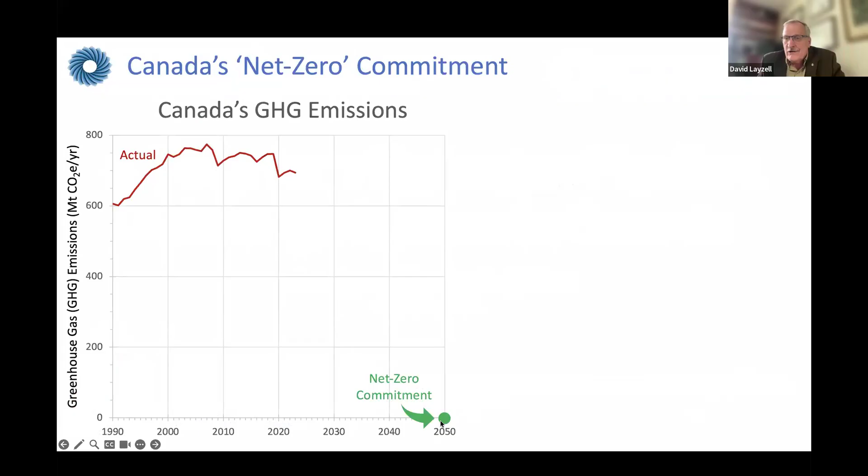The reason we're talking about hydrogen, of course, is because of this climate change problem we have and this greenhouse gas problem. Canada's been successful in the last 25 years in trying to taper off its continuously rising greenhouse gas emissions. So we're stabilized now and slowly coming down at around 700 million tons of CO2 per year. But that's still a long way away from our net zero commitment by mid-century, which is way down here. So obviously we've got a long way to go to reduce our greenhouse gas emissions.

Let's look at what comprises those greenhouse gas emissions in Canada. And about 80% of it is the red colored zones here, which is all associated with, of course, our energy use.

The part I'd like to focus on is that 46% of our emissions in Canada are associated with the combustion of energy carriers that serve end-use demand in sectors like transportation, buildings, and non-energy industry. Specifically, we're talking about gasoline, diesel, jet fuel, and natural gas. There are a few others, but they're small percentages—most of it is these four energy carriers.

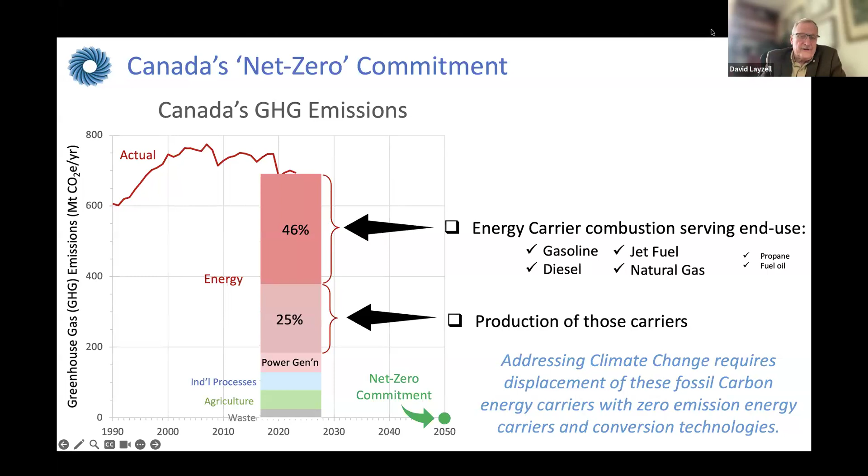Another 25% of our emissions are associated with the production of those energy carriers. So it's very clear that if we're going to address climate change, we're going to have to displace these fossil carbon-based energy carriers—gasoline, diesel, jet fuel, natural gas—with zero emission energy carriers. Often that requires a change in conversion technologies as well to deliver the energy service that society wants and needs.

So one of the questions is, what are the zero emission energy carriers we can use? This is not a very long list, I'm afraid—there's not a lot we have to choose from. Electricity is clearly the energy carrier of choice for decarbonizing many sectors.

Today, electricity provides about 22% of the end-use energy demand by the end-use sectors. Our analysis and analysis of many other groups suggests we can get up to 50 or 55, maybe even a little bit more than that, before we find that electricity as an end-use carrier just doesn't work, for reasons of storage challenges or mobility issues, etc.

Biofuels are another possibility, and they now cover about 6% of Canada's energy needs. It could probably go up to 10 to 15%, especially if we moved and converted biofuels into liquid fuels to help in transportation—for example, sustainable aviation fuels.

We could continue using fossil fuels, but actually add carbon capture and storage to them. Our fossil fuels now are over 70% of our end-use energy demand, and it probably has to drop dramatically, because in the future we're going to need CCS tied to those fossil fuels, and that really limits the applicability of fossil fuels on end-use energy demands because of the CCS challenge.

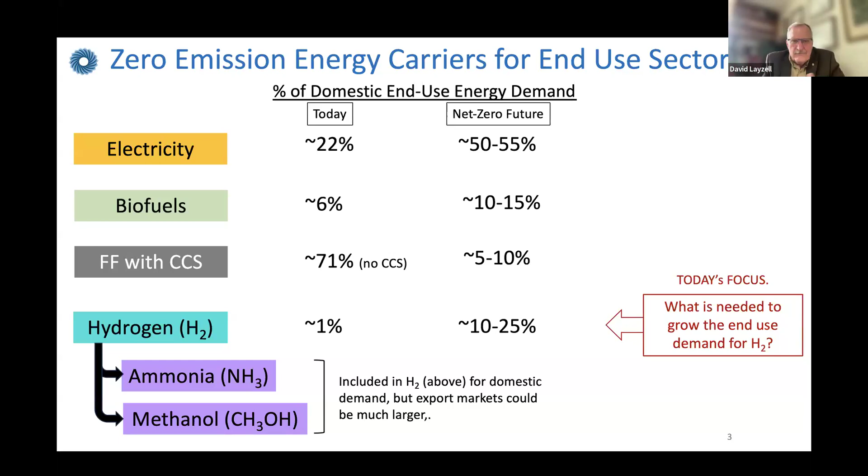So one of the questions, really the focus of the discussion today, is what is needed to grow the end-use demand for hydrogen. In the short term we have different strategies than in the longer term. Briefly, in the short term, the early stage strategies for low carbon, low GHG hydrogen deployment are really focused in two areas. One is to decarbonize our existing large scale production.

We produce about 8,000 tons of hydrogen a day across Canada, and virtually all of it is used as an industrial feedstock—making fertilizer, perhaps making methanol, also cracking bitumen into synthetic crude oil, and upgrading oil into transportation fuels, etc. So there's a focus certainly on decarbonizing that hydrogen production and sequestering the CO2 from it. That certainly is something that needs to be done.

The other area of focus is hydrogen as a transportation fuel, and the reason this has been selected is because transportation fuels actually sell for about 10 times or more the price of heating fuels. And so with a fuel cell, one can extract and convert hydrogen efficiently into electricity and extract the efficiency benefits of electric drivetrain vehicles, but in larger vehicles like big trucks and trains, etc.

The problem with this sector, and the big challenge anybody who's been working in this for the last number of years trying to move towards hydrogen as a transportation fuel is having, is really the high cost to purify, liquefy, transport, and deliver that hydrogen to the fueling station. But that's a challenge we have at the stage we are today, and there is certainly progress year by year as we try to move towards deployment of hydrogen.

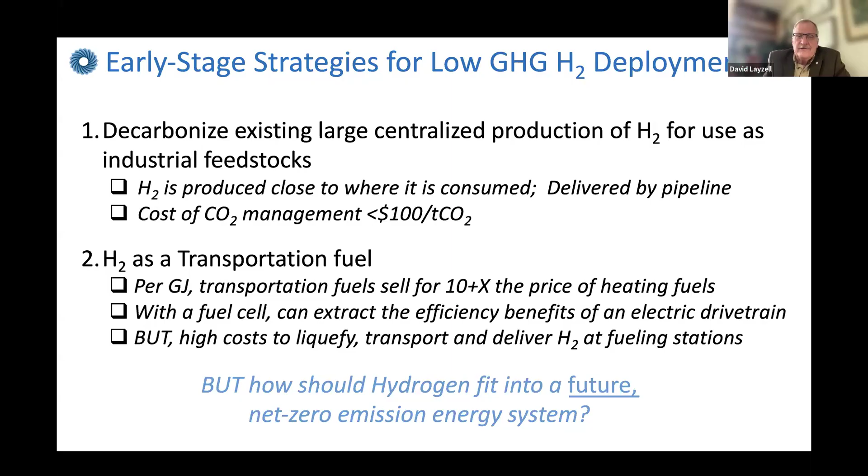What I'd like to do is jump forward and look at the role that energy systems analysts are looking at for hydrogen to fit into the future in some future net zero energy system. There's a growing consensus that what we really need in a future net zero emission energy system is essentially four complementary grids, if you like, none of which produce or put much carbon dioxide—or any—into the atmosphere, and some are actually removing carbon from the atmosphere. The one, of course, is electricity.

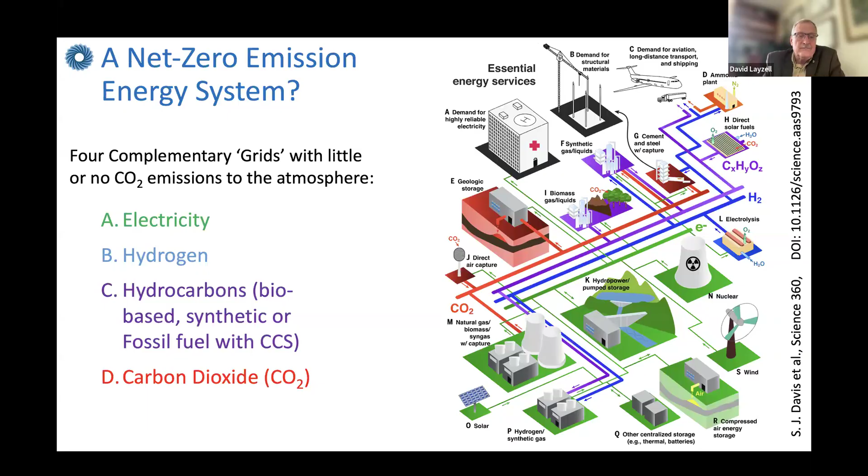An electrical grid is expansion and improvements of the grid we have today. Another is a hydrogen pipeline system with storage and moving hydrogen around. And a third one is a hydrocarbon grid, but where the hydrocarbons are based more on bio-based or synthetic hydrocarbons. And if fossil fuels are involved, it's combined with carbon capture and geological storage. And then a CO2 grid that basically picks up the carbon and either takes it to storage sites or uses it as a feedstock for hydrocarbon production with hydrogen along with it.

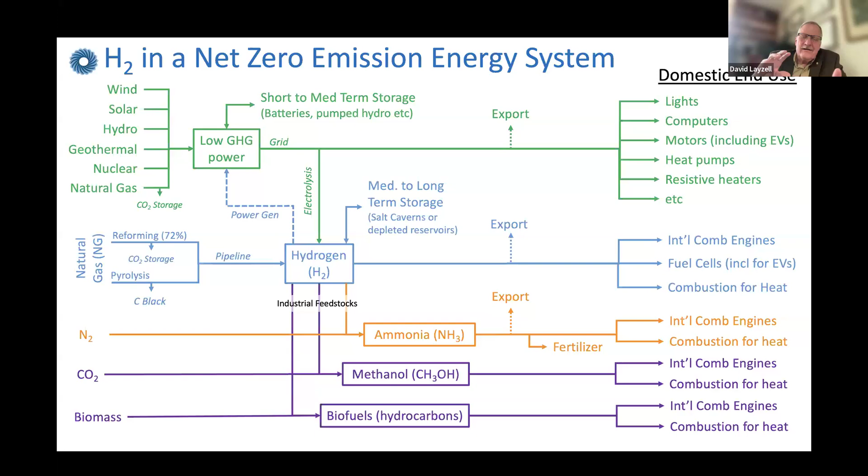So in some ways, this kind of a diagram, with a lot of information on this slide, summarizes some of the key components of how hydrogen could fit into a net zero energy system. What I'd like to do is highlight a few key features as we go through, so you're going to see this background chart with different parts highlighted.

Important to start with is that the low GHG electrical grid is really the backbone of the energy system, but it has some significant challenges as deployment increases from the 22% of our end use demand today as we get to 30 to 40%. These challenges often become more and more severe.

One is the problem of intermittency of supply. For example, wind and solar are intermittent supply, fantastic energy sources, low cost. But what you need is electricity storage and peakers to make up for them and to get them working best in an energy system. We also have conditions as we get more wind and solar, and even nuclear and others where supply, because nuclear can't be turned down very easily, can exceed demand. And what gets wasted is energy and poor economics from the cost of producing electricity that's not being used.

And it's particularly challenging for electrical systems to deal with large swings in demand, for example that can happen seasonally. This is certainly when you talk to grid operators, the idea of moving space heating to electricity, it's great in small amounts with moving to heat pumps, etc. But as you start looking at entire heating loads for space heating, from large buildings and small, moving to electricity becomes difficult for grids to handle.

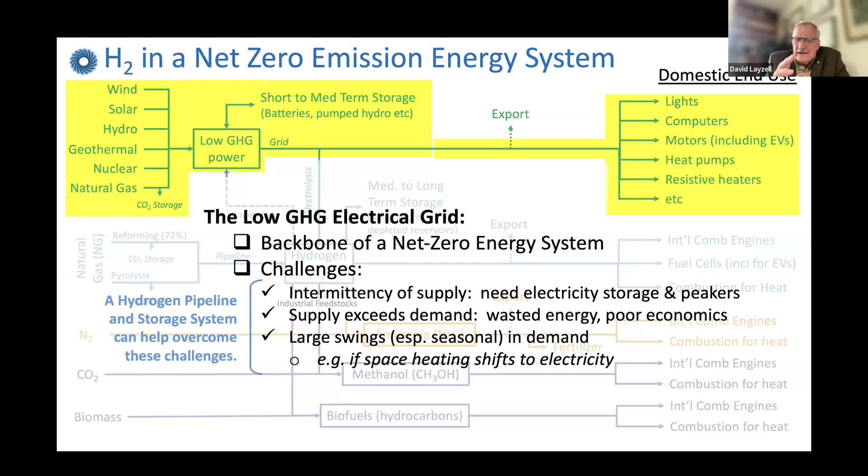And a hydrogen pipeline and storage system, I think, is key to help overcome some of these challenges. For example, hydrogen could be an on-demand sink for excess power. But in order to do this, you really need pipelines and storage that are linked to locations where the grid can put electrons and use some of the excess electricity to make hydrogen through electrolysis and put it into medium and long-term storage, if it's not being used directly.

And storage in hydrogen, we've got a lot to learn, and we can gain a lot of insight from the way our natural gas energy system works with pipelines and salt caverns and depleted reservoirs for storage. And certainly countries around the world are starting to look at hydrogen using similar resources and similar infrastructure in the future.

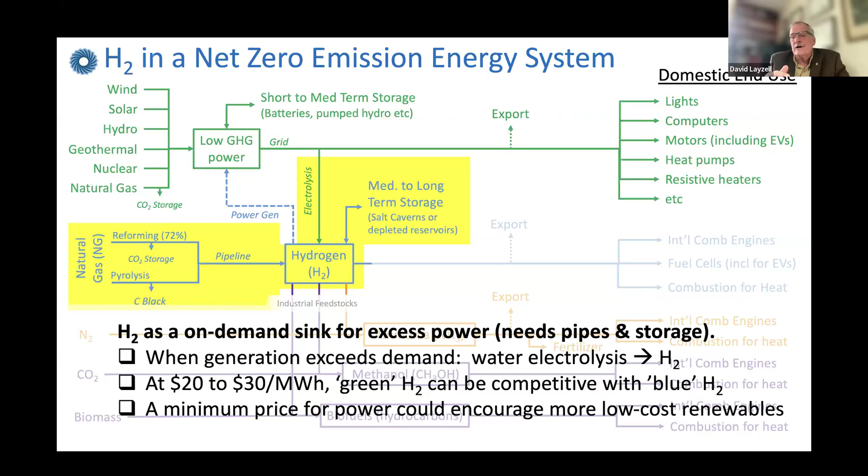And if you get a price of say $20 to $30 a megawatt hour for this excess electricity, green hydrogen can be made competitive with blue hydrogen today in Western Canada. So that demonstrates it's difficult to make green hydrogen competitive with blue if you're paying a lot more than $20 or $30 a megawatt hour. But you can do it with a low price, and certainly $20 to $30 a megawatt hour is better than just throwing the electrons away. And a minimum price for power could actually encourage more low-cost renewables coming onto the grid.

One of the issues is, once you've had more hydrogen being brought in through such a process, what are the optimal uses? Certainly heavy duty transportation, trucks, rail, etc., is again important, and it can be made even more cost effective with pipes and storage than with trucking it around as liquid hydrogen. Medium and high temperature heat is another possibility where hydrogen could actually start to provide a source of heat for larger industrial buildings.

I would say a relatively low priority is taking that hydrogen back to electricity again, because the efficiency losses there are only about 55% at best to take the hydrogen back to electricity.

And one's better to basically look at seasonal storage where you're using it for heat or other parts of the energy system.

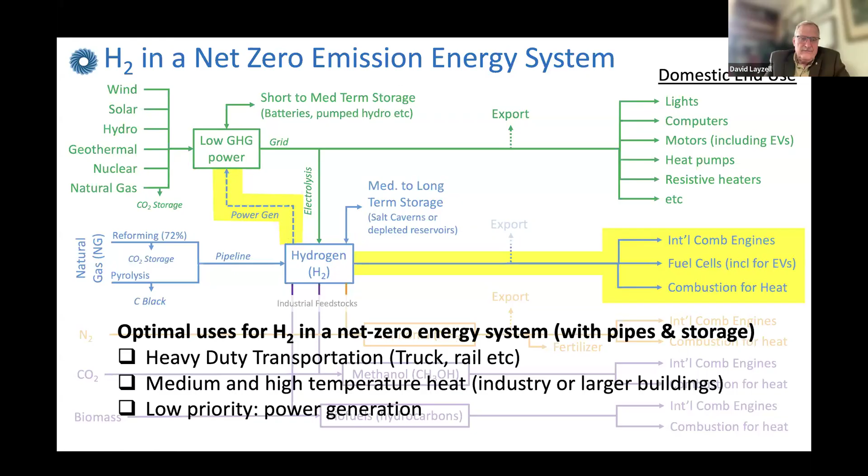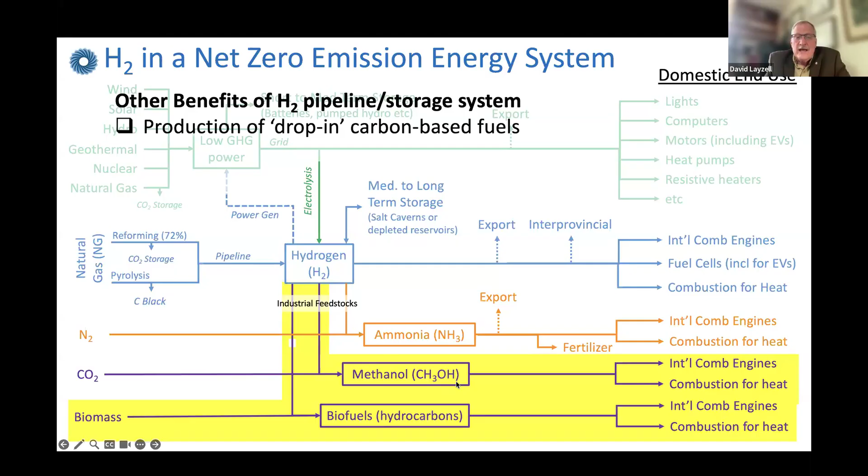The last thing to point out here is that if you have a hydrogen pipeline storage system, one can start to use this hydrogen to enable, in areas that have a lot of biomass production, the production of biofuels or hydrocarbons from lignocellulosic biomass or from CO2 into energy carriers. Or there's even the possibility of ammonia production, which would be used not only as a fertilizer, but actually as an energy export product.

Indeed, Canada today exports about two-thirds of the energy it pulls out from Mother Nature. In a net zero energy future, I think the world's going to be looking to Canada to provide zero emission energy carriers for the future. And certainly there's evidence of that even today, with countries looking to Canada to potentially provide zero emission energy carriers.

One thing that's important to note is if you want to move large amounts of low carbon energy long distances, hydrogen is about 20%, or one-fifth the cost, of moving a similar amount of electricity for a similar distance.

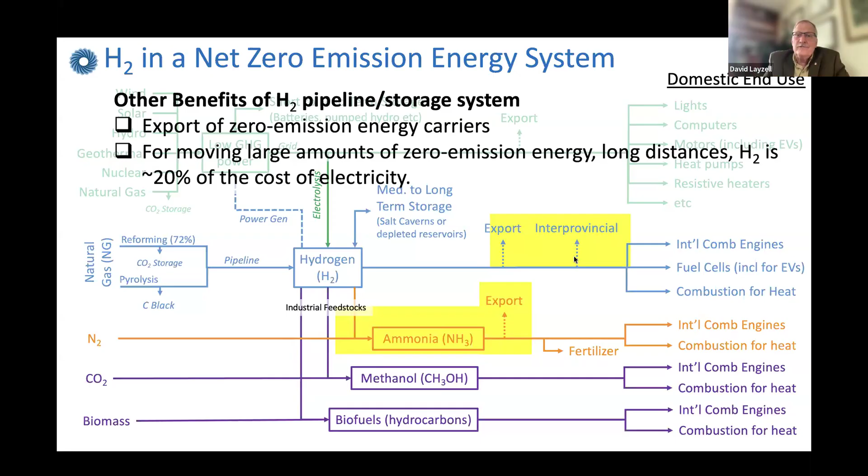So I hope to communicate the real importance of having research groups like Ron Hugo's, which we're going to be hearing about, looking at the role of, and the challenges and opportunities for, hydrogen pipelines and hydrogen storage systems as we move to a net zero future. Thank you.

Great. Thank you, Dave. Really appreciate that. I think you certainly made a strong case for the why and the need for large scale hydrogen infrastructure.

Now, I'm hoping we can switch gears a little bit here and get a sense of where we are today, what research is ongoing into pipeline storage systems. We all know the University of Calgary is an excellent university doing some really impactful research. So Ron, are you able to tell us a little bit more about the Pipeline Engineering Center and the research you're working on? I'd invite you to feel free to share your slides as well.

Okay, thank you, Zach. Can you see that? Yes. Okay, all right. Well, thank you for the introduction earlier.

I'm a professor in mechanical engineering at the University of Calgary, and I've been the director of our Pipeline Engineering Center for probably about 15, maybe a little bit more, years now.

The Pipeline Engineering Center at the University of Calgary was initiated at the request of industry. Those who are in Calgary will know that every two years we have the International Pipeline Conference. It was a group of people who put that together, and had been teaching at the University of Calgary through ContEd, and they wanted to see a more formalized training program. So they approached engineering, specifically mechanical engineering, and that was when we put together the Pipeline Engineering Center.

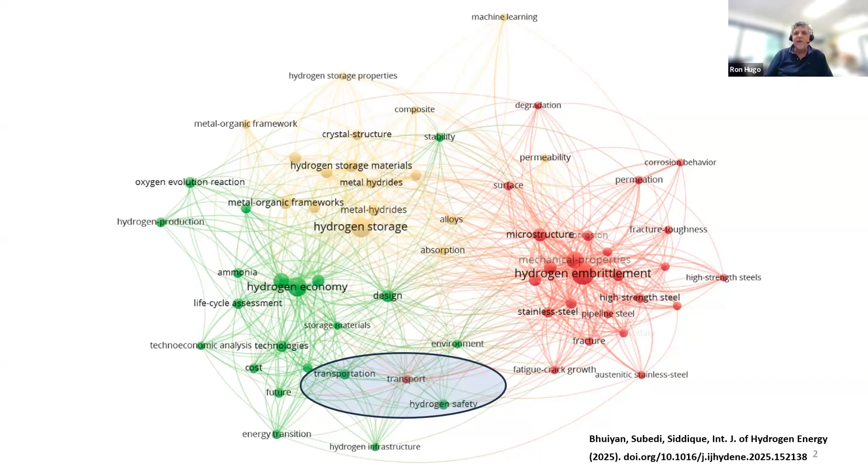We look at transportation, we look at safety. Other researchers within the university look at the material science aspects. I know a little bit about that, probably enough to be dangerous, but I can answer some questions on that. The majority of our work is looking at hydrogen safety, which is what I'll be talking about in the next few slides.

So an overview: I'm going to talk about a number of our current research projects. One involves a digital twin of transmission pipelines. Another one, Dave mentioned other vectors for hydrogen, so we have one project looking at leak detection from an ammonia pipeline.

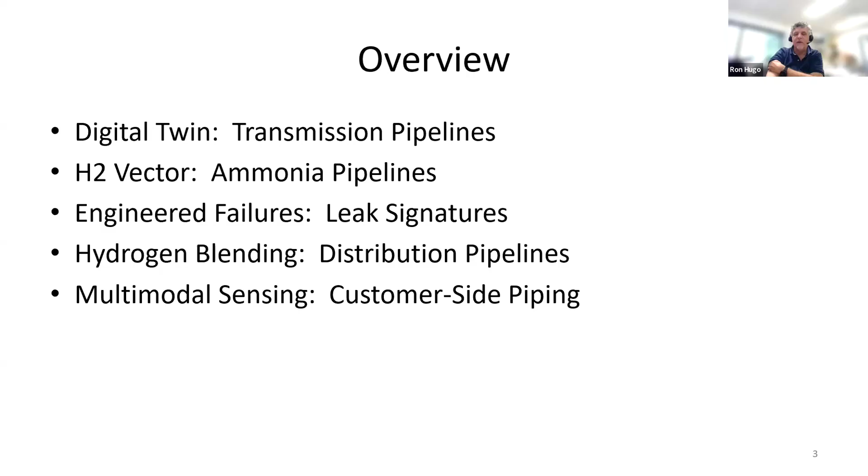I'll discuss a little bit about engineered failures. What we try to do is recreate real world failures from pipelines, and the purpose is to record the mechanical signatures associated with the leak, which then gets integrated into leak detection algorithms. I'll also talk about hydrogen blending from the distribution pipeline, specifically customer side piping, and then multimodal sensing is where I'll close it up.

All of our research is underway through the Advanced Pipeline Research and Innovation Laboratory, made possible through a donation from Plains Midstream Canada, as well as the former CEPA, now Energy Connections Canada. They enabled us to put together this lab that gives us the ability to do a wide range of research projects, some of which are the hydrogen ones I'll be talking about today.

The first project is about hydrogen transmission, sponsored by Alberta Innovates. What we're doing is developing a digital twin of a hydrogen transmission pipeline system, through a number of different steps, which I'll go through in the next set of slides.

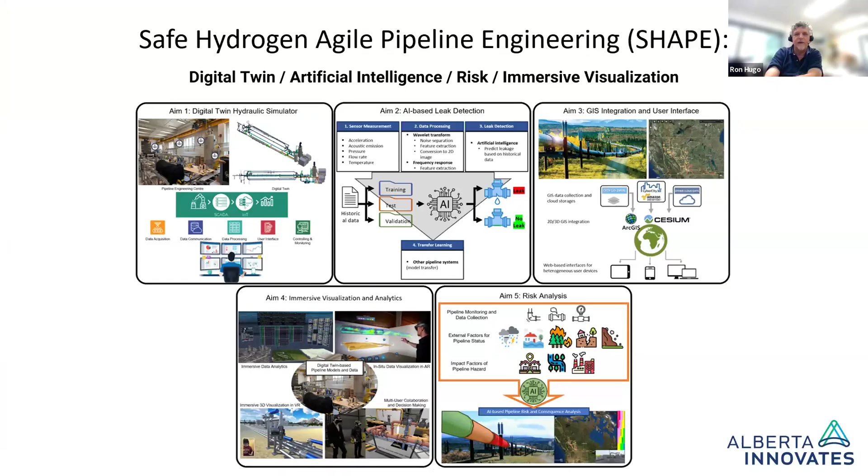On one level, we're developing the computational aspect of the digital twin, taking data from our flow facility and putting it into a hydraulic simulator. We then monitor the difference between the calculated and observed values, and that difference becomes the flag telling us if we have an anomaly in the system, specifically a leak. We're using artificial intelligence and machine learning for a lot of the detection aspects.

However, with AI and machine learning, anybody who's worked with it knows you need to do a lot of pre-processing to make sure you're getting the pertinent physics out of the data before putting it into the algorithms, which is where we spend a lot of our time.

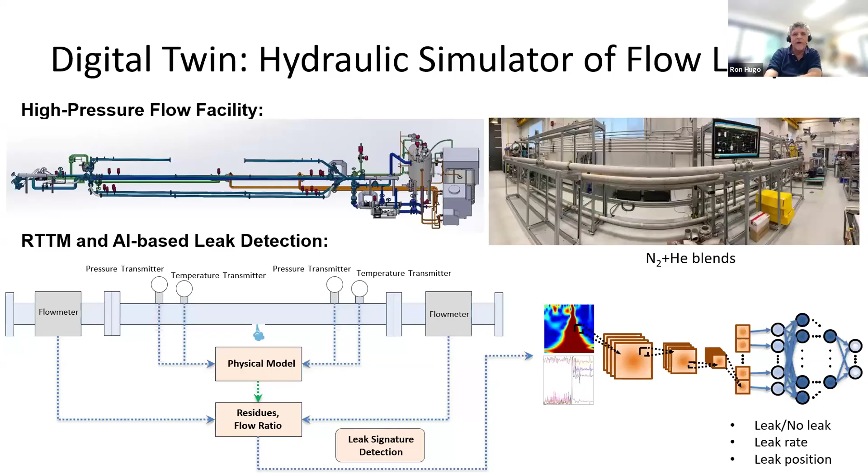Another thing we're doing on this project is modeling a hypothetical pipeline. Assume we use the Alberta Products Pipeline to flow hydrogen from Edmonton to Calgary. We're looking at the right of way of this pipeline, and at risk elements that could be introduced to it, specifically places where failures have occurred before, such as slope instability due to heavy rain or river crossings where scouring could occur.

So those are the two threats we're looking at with this research project. It could be expanded to many other types of threats, but these are the two we're focusing on for this specific project.

With the risk integration, we're looking at rainfall, coupled with snow melt in the mountains. For those in Calgary, they'll remember the floods we had a number of years ago - that was due to a combination of heavy rain in the mountains when there was still a lot of snow, leading to very high river flow rates, which can be damaging to systems.

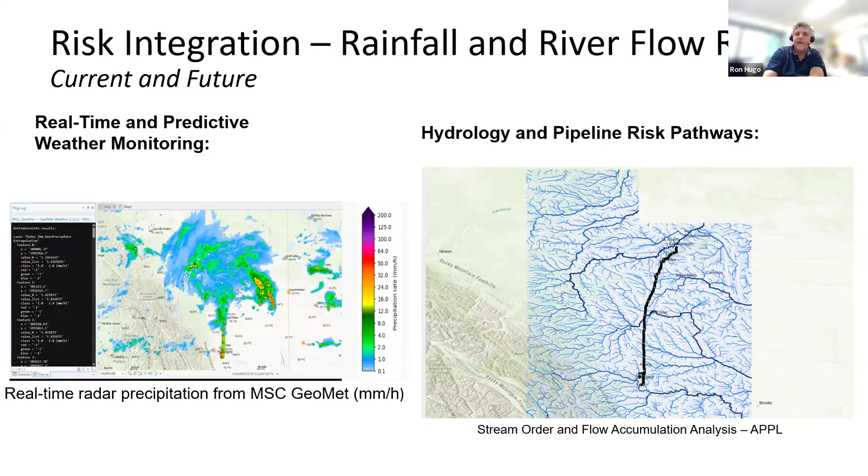So we're looking at integrating current rainfall plus future rainfall. As part of the research, we're asking: could there be a threat to a pipeline tomorrow? Could there be a threat in 2 days? That information can then assist the operator with being aware of a coming threat.

The final stage of this ties it together with researchers from computer science and software engineering, who work in extended reality. Basically, you put on a headgear and can go from compressor station to compressor station in the virtual world, or even in the real world with the headgear on.

This would be more for an operator who wants to visit all the compressor stations online - they could go into it virtually, look at the environment, and monitor all the data coming through. We also couple it with the right-of-way data mentioned earlier with the risk integration, which wraps it all together.

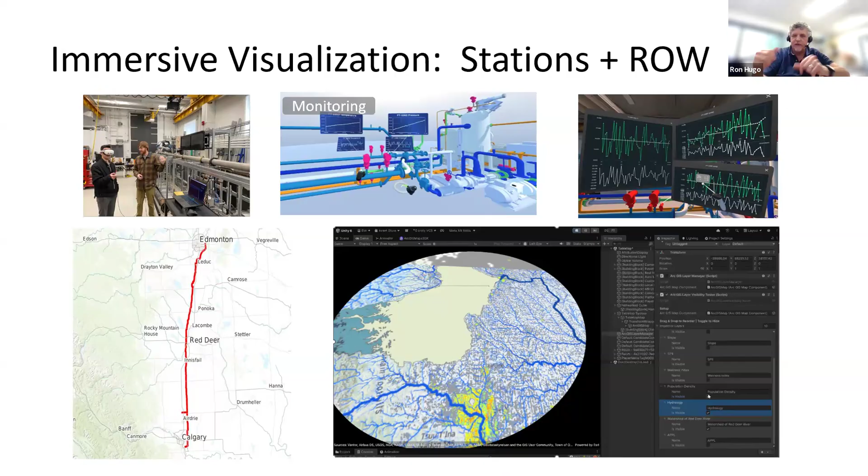So that's one of the research projects we have. Another one, sponsored by Natural Resources Canada, is an alternative vector for hydrogen ammonia transport.

Ammonia is being proposed as one of the future vectors for energy transport, but we all know that if you have a leak of an ammonia line, it could be quite dangerous. It can be dangerous to human health as well as the health of animals and the environment. It's something that we want to avoid.

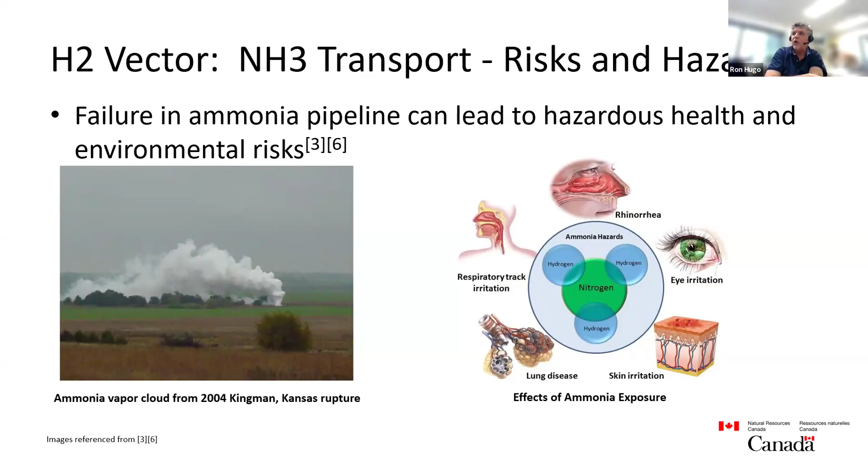So what we're doing is studying what happens during an ammonia leak. When you look at the physics of it, in the pipeline you pressurize the ammonia into the liquid state and transport it. But if you have a leak, once the ammonia approaches the leak site there'll be a pressure reduction, and we're looking at the signatures associated with that process, which could entail a phase change. Basically, you get flash vaporization near the leak site.

What we do is intentionally damage a section of pipe, and then in the flow facility we can independently vary the flow rate, or Reynolds number, which is usually what we quantify in pipeline systems. We can also independently vary the pressure and the temperature of the fluid flowing through the flow loop. So by damaging the pipe section to the point where it's near failure, we then do finite element analysis to calculate what the rupture pressure would be.

We put that damaged pipe section into our flow facility, and at full operational Reynolds number, we slowly increase the pressure to failure. This gives us a real world type failure.

A lot of research done with pipeline systems, especially leaks, usually involves putting a valve on the pipe and then opening it. That's not a real world failure. If you want to collect the physical signatures, it's best to emulate a real world failure.

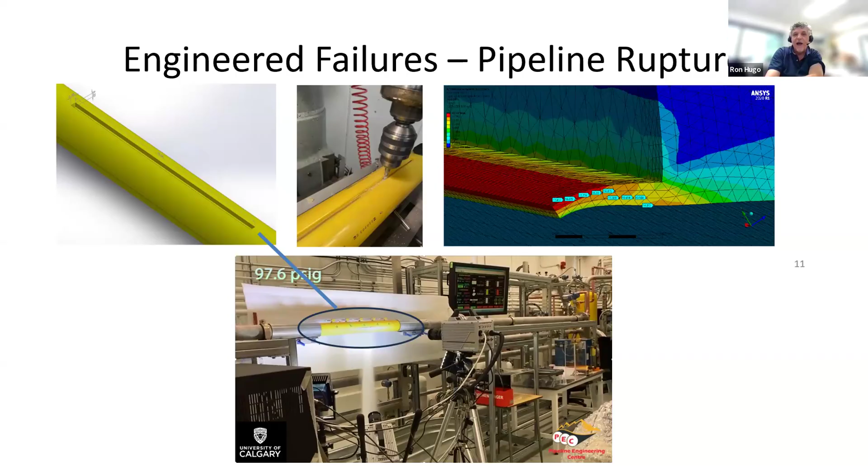But we also do other things, like looking at pinhole failures. What we do is intentionally damage a section of pipe by drilling a very, very small hole, then put a metallic foil that could be anywhere from 10 to maybe 15 microns in thickness onto the pipe. We pressurize it, and it initiates a natural failure as well, which would emulate corrosion on a pipeline, the very thin membrane you'd have left before the corrosion turns into a pinhole leak. So we're using these types of approaches to study the mechanisms of failure.

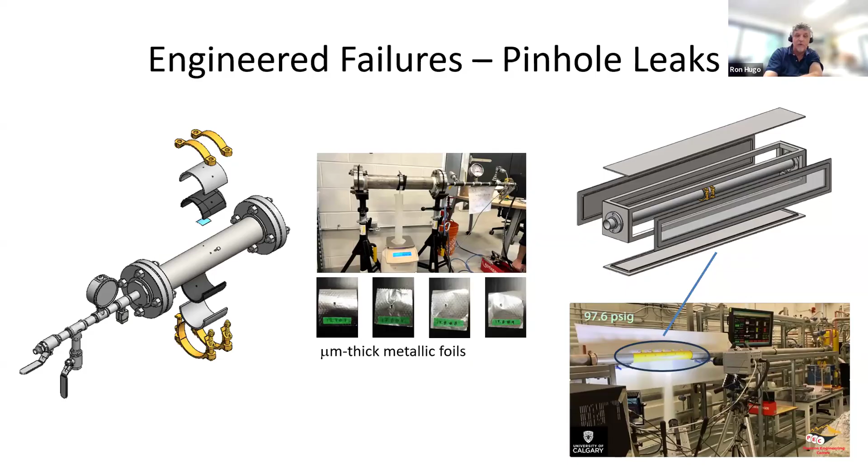With all the technologies we're developing, you also have to be able to monitor things in the field. So we're doing research taking the algorithms we develop based on the leak signals we measure, coupled with artificial intelligence and machine learning, but we need to deploy these systems so they operate 24/7. We have projects using solar power in very, very remote locations where you put these systems and monitor what is happening within the pipeline. We're collecting terabytes of data over several weeks, very, very large amounts of data.

You can't transport or transmit that data back through your SCADA system. So what we do is edge computing, reducing the data locally. The biggest challenge here is balancing power consumption with the algorithms versus the amount of power you can store to get through the low-energy periods, like December 21st.

A day like today would be horrible for a solar system here in Calgary. So we have storage batteries that can keep the system operating. Right now we average between about 20 to 30 watts consumption with the computational systems on our deployed systems.

Hydrogen blending. This was a project we did with ATCO Gas. We started by looking at the effect of a hydrogen blend on the performance of odorant, focusing on customer side piping, coming from the meter into your house to the furnace. We looked at both horizontal and vertical flow scenarios, studying the physics of hydrogen blends.

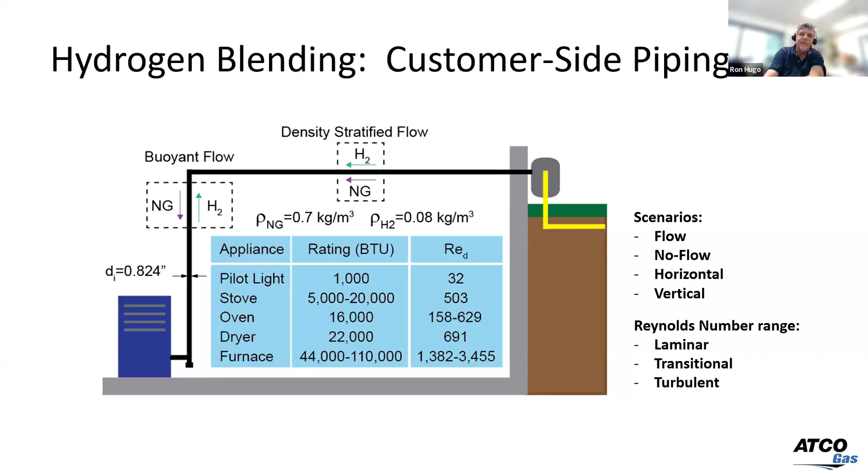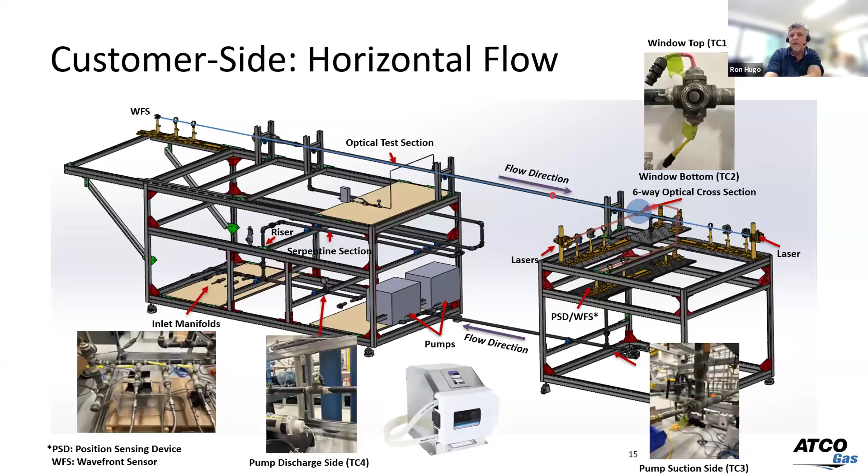So we have ways of mitigating that. One way is reducing the wall thickness — right now we're at about 300 microns. The other way is using multi-wavelength, so on our detector side we'd have different bandpass filters, and we'd reject the energy coming from other views.

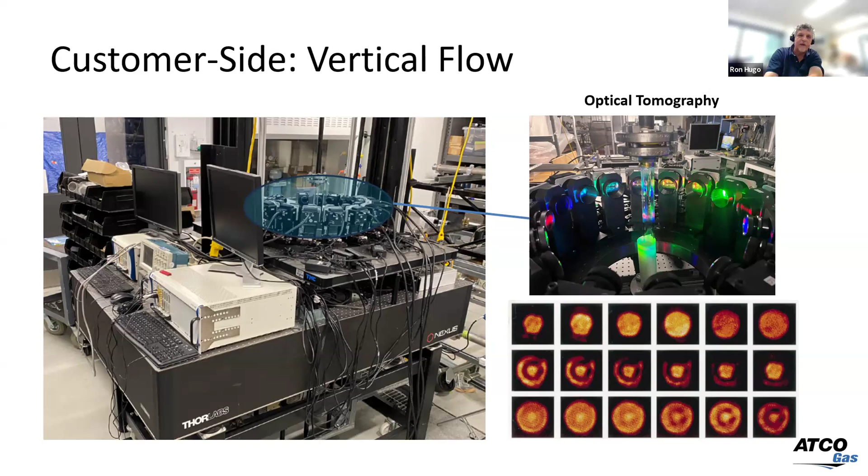What do you get out of this? You get a cross section of what's going on in the pipe, and with that we can monitor how the concentration is changing in a vertical flow scenario. That's what we're doing with this particular project.

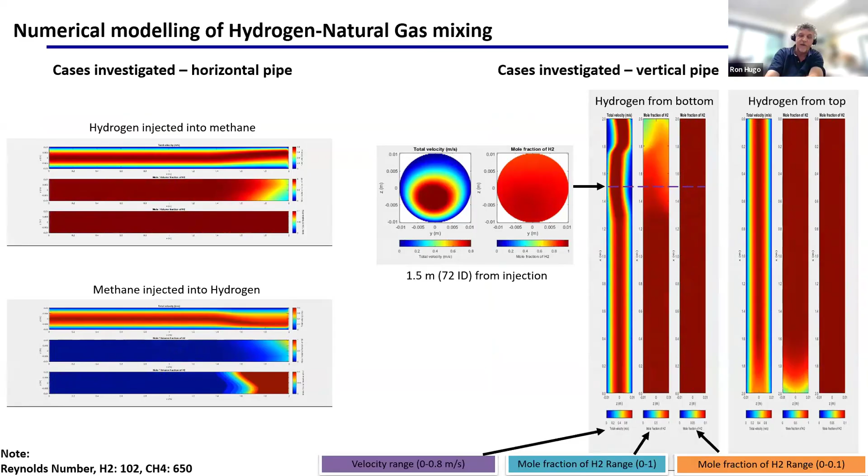Numerical modeling. All of the research involves numerical modeling as well. Here you're looking at hydrogen flowing into methane, either horizontal or vertical flow. We can look at this at different Reynolds numbers, and we use these simulations to compare with what we've measured experimentally. It can also serve as baseline data to develop our optical tomography system shown previously.

The final project is the multimodal sensor system, also sponsored by Alberta Innovates. The idea was to develop a low-cost sensor for your house, so that if we're doing hydrogen blending, we could measure the concentration of hydrogen coming into your house. Instead of just using thermal conductivity, this project involved using multiple sensor systems and performing sensor fusion to bring them together.

The sensor techniques we used included a combination of ultrasonic as well as the thermal conductivity sensors that I mentioned before.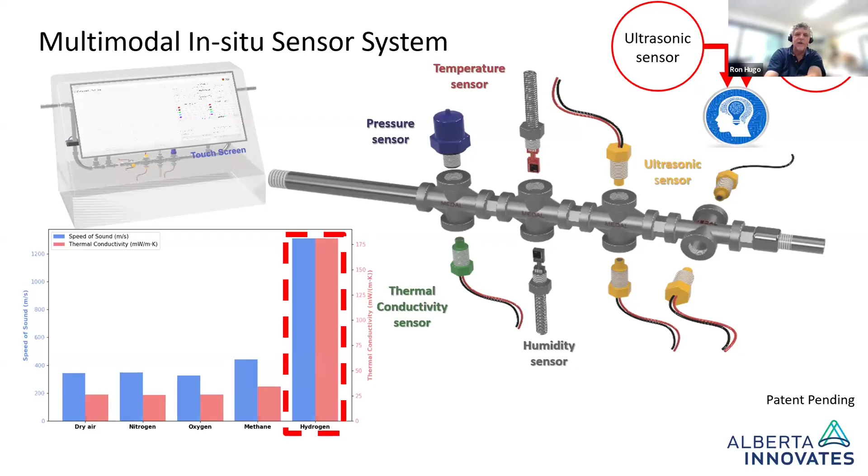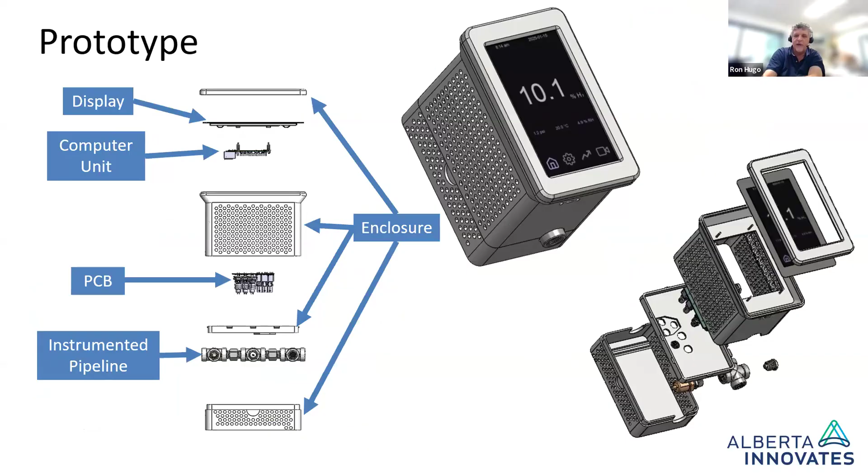And the results were very, very strong. We got very good results by performing sensor fusion, by combining these two sensor streams. And then this was the final product that came out of that. We had an interface that would be a box you could put in your house where the gas line comes in. That data could then be streamed to ATCO or Enbridge or whoever might be doing the gas distribution in your local community.

I'd like to acknowledge all of the different granting agencies and companies. We do a lot of things through NSERC, through their partnership program, as well as with Alberta Innovates. We are truly grateful to all of the different companies for giving us problems and helping us educate the next generation who will be going off and working in industry, academia, or government labs. So with that, I will conclude my talk.

Great, thank you so much, Ron. That was very illuminating — lots of research underway, and we've got a few questions coming in.

I've got a bunch of questions and I'm hoping we can get to everything in time. Maybe I could take a step back first. Dave, you made a very strong and compelling case for a decarbonized world that we're going to need a hydrogen transportation network, which would include storage as well as pipelines. When we talk about that, how do you see storage complementing intermittent renewable sources such as wind and solar? I think a lot of us have heard about seasonal storage potential, but is it across Canada? Is there a particular jurisdiction where this might be more attractive? And what else don't we know about this?

Certainly, I think the opportunity in Alberta, because we have lots of low-cost natural gas and we've got huge geological storage capacity in Alberta, there's potential to make low-cost hydrogen from natural gas with autothermal reforming and capture the CO2. Not many other regions of Canada have that geological storage capacity, so I could see Alberta producing a lot more hydrogen that would then be sent to other provinces, and perhaps even to the United States if they're nice to us, as a form of zero emission energy to support the movement towards a low carbon economy.